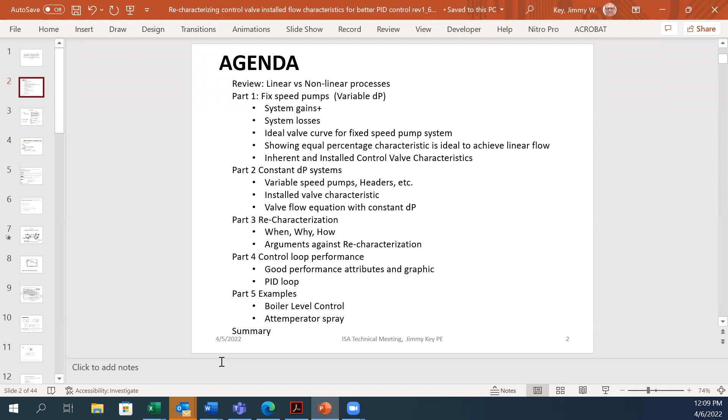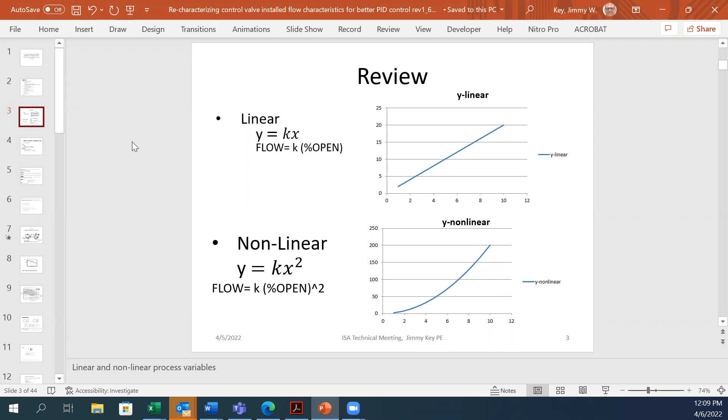The basics. The basic review is what is linear and nonlinear. Linear is basically a straight line, and nonlinear is any equation that is not to the first power. So you see below, it's got a square and it shows it's nonlinear.

A little about the control variables we deal with the most often. All these variables are linear with respect to flow. As you can see, the differential of volume is flow times time, fixed density, and level has all of those attributes, making it linear with respect to flow. Level, pressure.

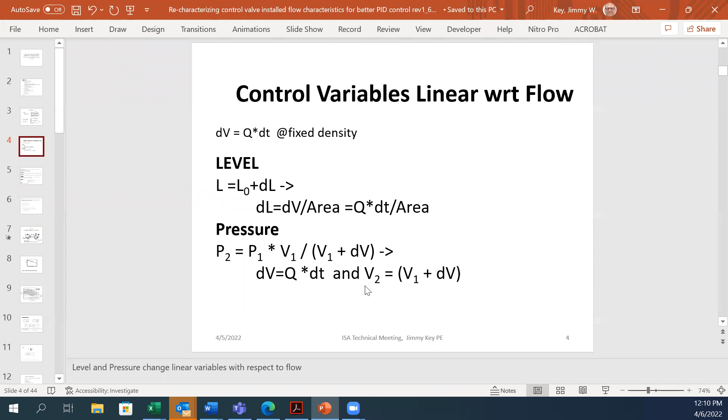I use this example, an attemperation water flow calculation example, really substituting enthalpy for temperature to show that it's a linear process. There's no radicals, no powers in here.

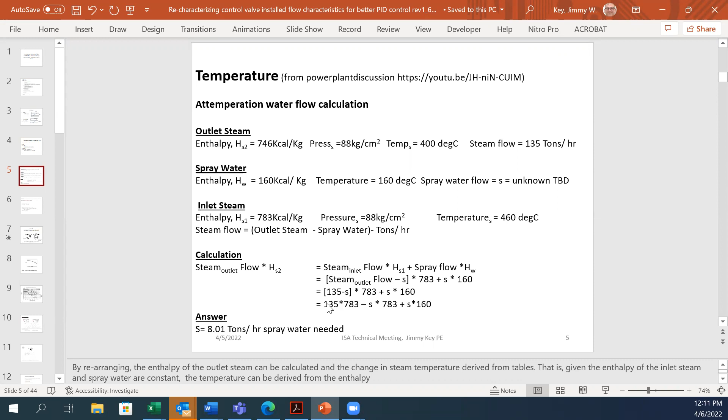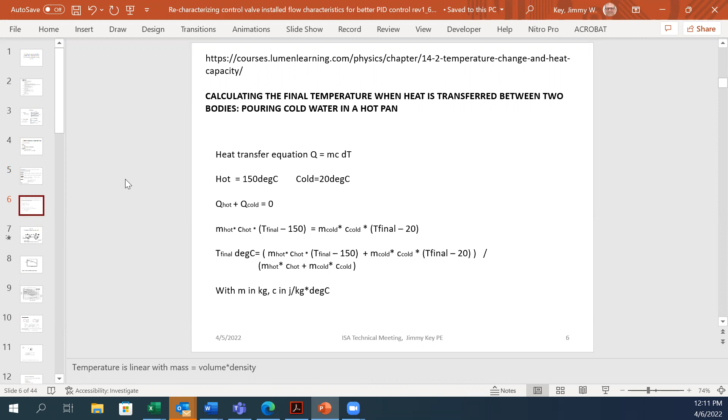And I just use this other example. Temperature is linear with respect to mass flow in this mass energy transfer equation. Any questions so far?

Okay, this next part is going to be kind of like pulling teeth, but we'll go through this as we go through the fixed speed centrifugal pumps. This is a diagram of a fixed speed centrifugal pump in a control loop. You got minimum flow valve, you got your control valve, your level control valve.

In this system, let's just look real quickly at each component of this equation, which really defines the drops across the system. We got our net positive suction head into our pump. That's a positive. We've got our pump, which is positive. We got drops caused by our valve and the velocity of the fluid through the piping. We got losses due to elevation and to back pressure. You add all that up, it should come up to zero.

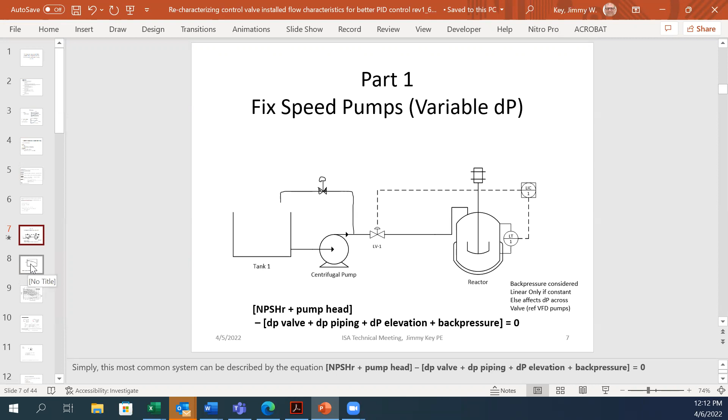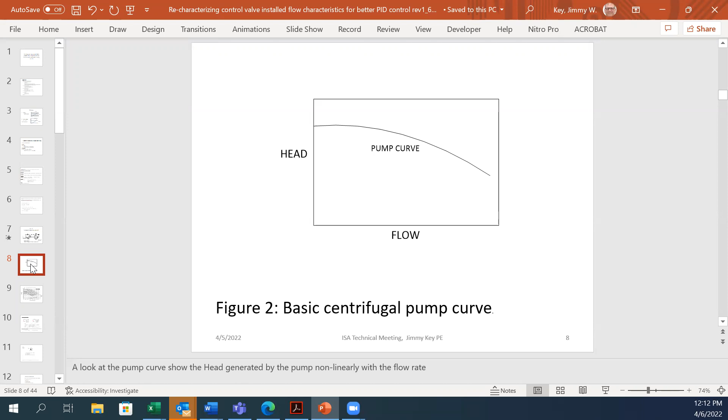Now, looking at the pump itself, the head that it generates follows the curve, from higher head at lower flows and lower head at higher flows. And you can see it's nonlinear. So this is what you see in the manuals.

And this will take care, that's probably your minimum flow for that pump that you want to make sure that you have. And of course you do that because you don't want to overheat the pump and cause cavitation and flashing inside the pump.

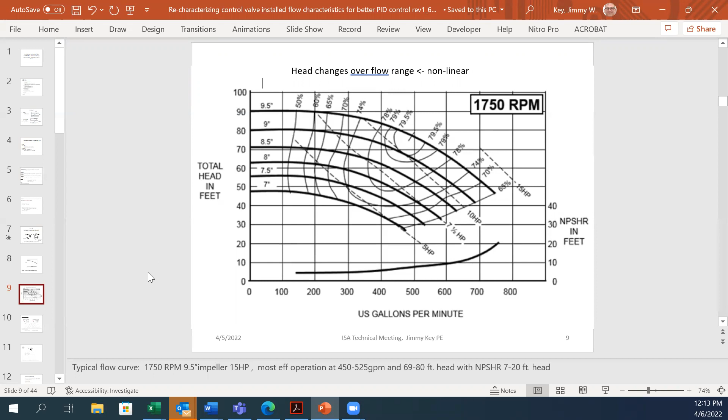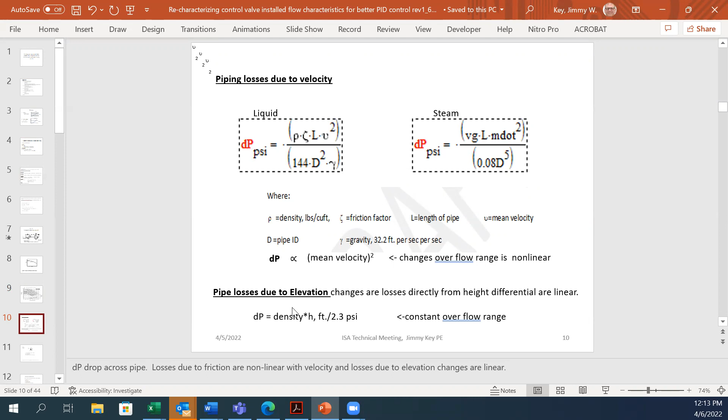And the DP loss across the valve is nonlinear with respect to flow. As you can see, here's the DP, and if you rearrange this equation, it's nonlinear. Now, the reason I'm talking about linear and nonlinear is to see that there can be a balance that can be made with the control valve, with its inherent flow characteristics that actually produce an installed linear flow.

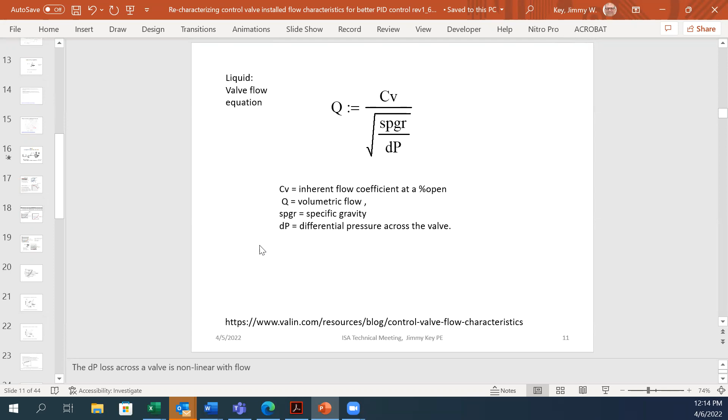But real quickly, where does our data come from when we do the sizing of this? The data usually comes from what we call a pump run, and it's done by the mechanical people, and it gives us all the data that we need. Really, they do it to size the pump, and then they allow us a certain amount of drop across the valve, and that's how we end up sizing the valve.

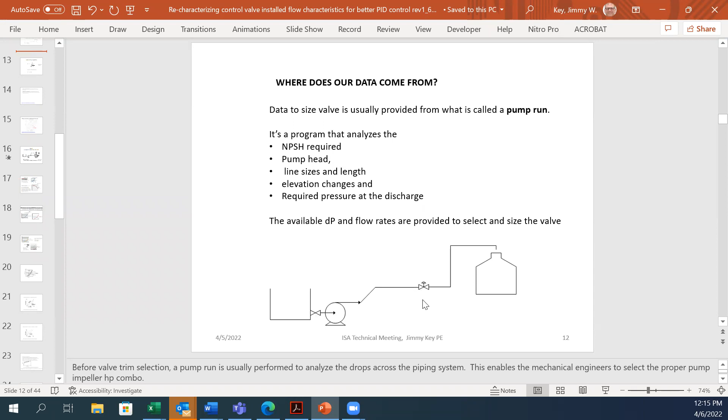This is the ISA liquid flow equation for a valve. Of course it's nonlinear due to the term in the denominator, but note that if the DP is constant, the term in the denominator becomes a constant, and this is what you get. That's a linear equation. Nonlinear, linear.

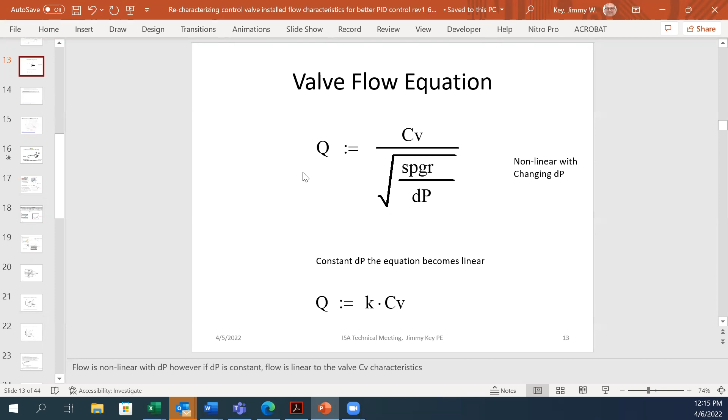So there's two different characteristics we're going to talk about here. One is the inherent flow characteristic, and that's the characteristic when a valve is operating at a constant pressure drop. And then we have an installed flow characteristic, and that's when the valve and the piping effects are taken into account.

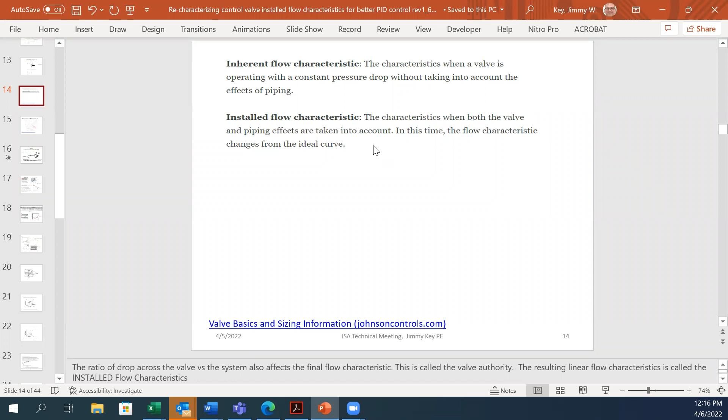There are various different types of trims you can get for valves. In most cases, we use equal percentage or modified parabolic when we're doing systems like where we have variable differential pressure across the valve, and we use linear where the pressure is constant.

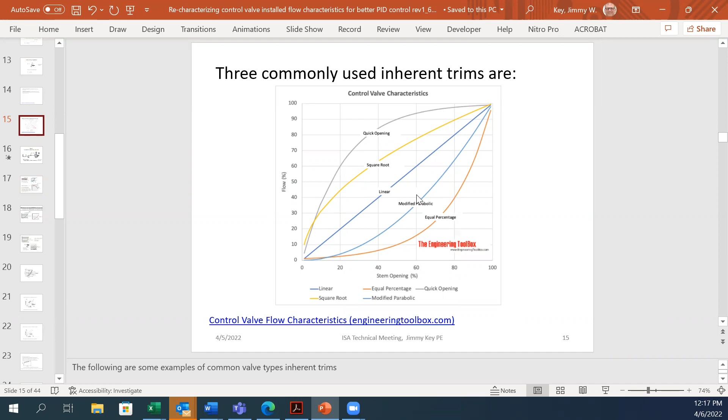Okay, let's see, this is slide 15.

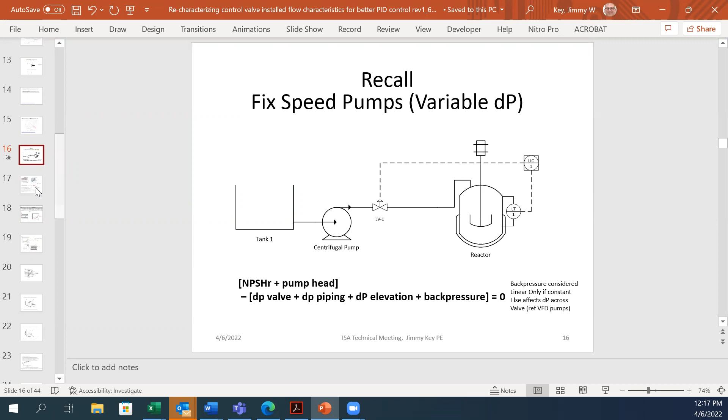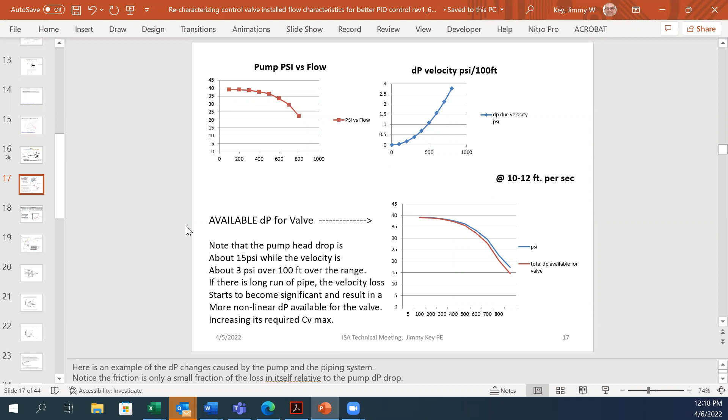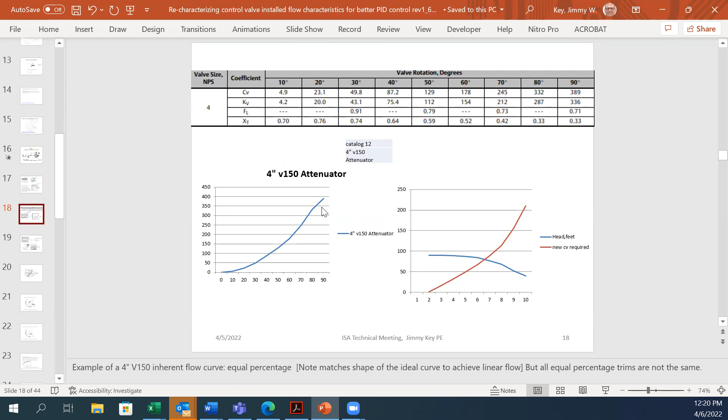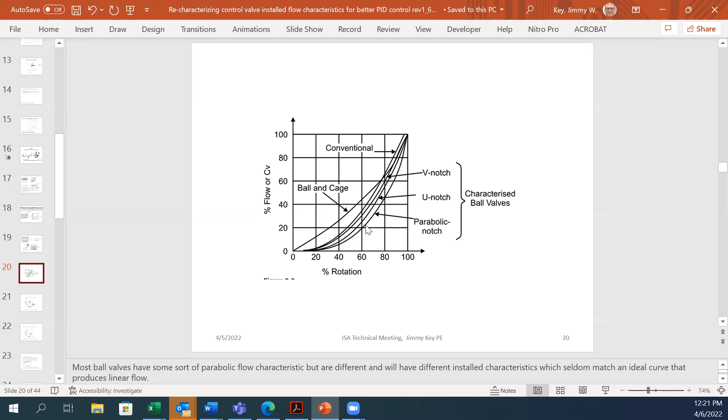Okay, but if you remember this curve here, this was perfect, for example, that we had. But not all curves, not all valves have the same type of curve. All equal percentage curves are not the same, is the bottom line there. So they won't produce a linear result as perfect as what an ideal curve would produce. And these differences result in a nonlinear process gain as you go through the stroke of the valve.

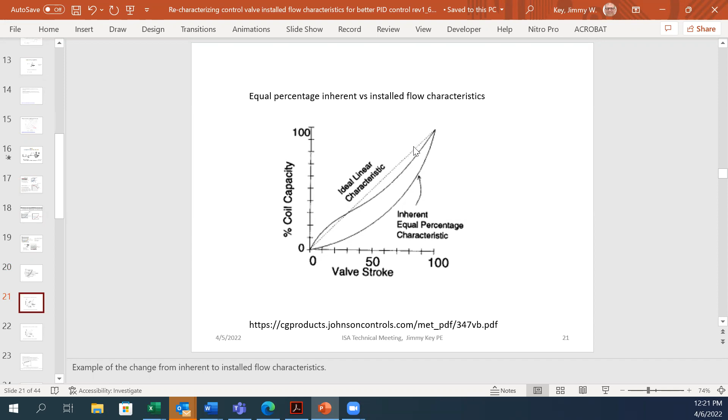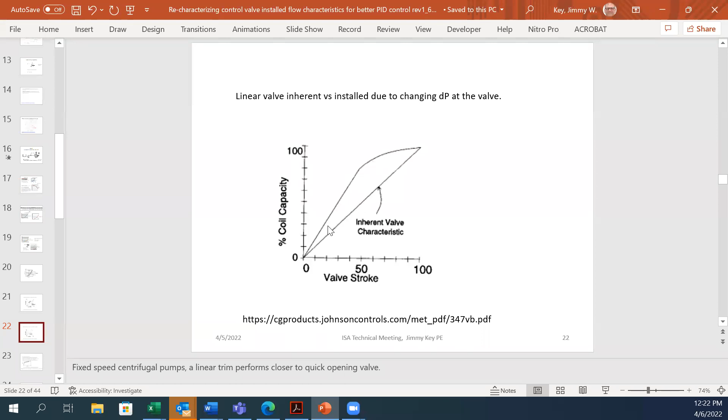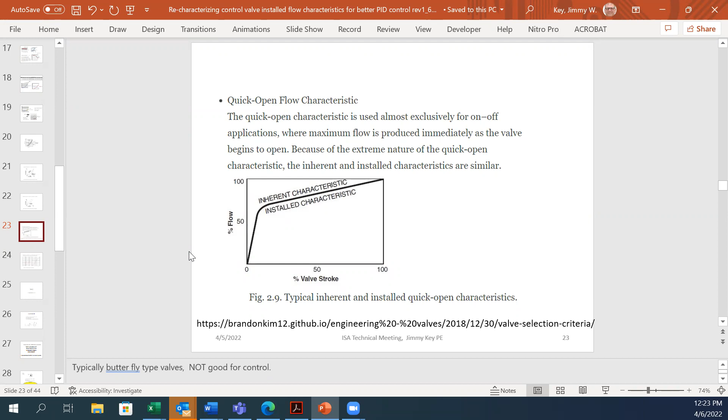In most cases, there will be some difference between the valve's ideal and actual flow characteristics. But re-characterization of the control output to move the installed flow characteristics to more linear can help you with stability and minimize valve travel.

All right, now, does anybody have any questions on material before that?

Okay, again, what we're trying to show is that by having a more linear flow characteristics from your valve, your PID controller will end up with better control. You'll be able to tune it with probably more gain and less integral. And the result should be that your integrated sum of errors will decrease and your valve travel should decrease.

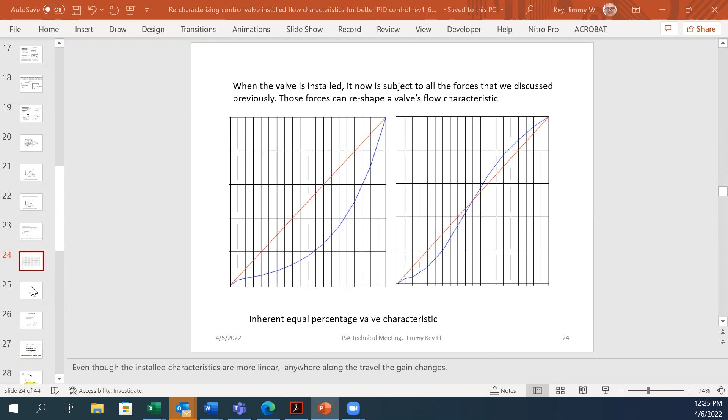So let's go on to, that's where what we looked at before were instances where the DP across the valve varied, and it varied due to the pump running out on its curve, and due to the velocity causing loss of DP in the piping system.

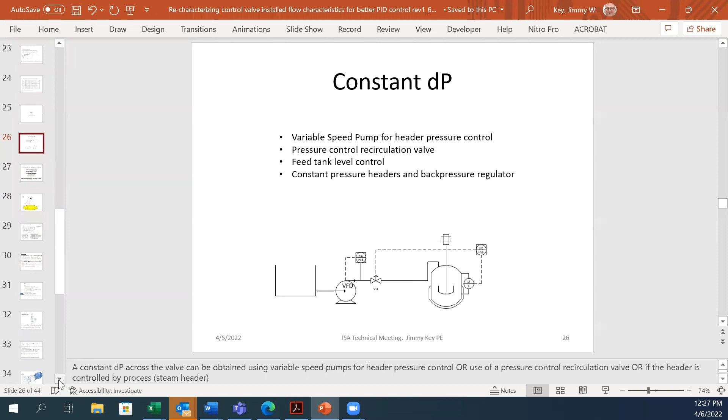With a constant DP system, installed valve characteristics follow their inherent CV curve more closely. So whatever you get off the shelf, if it's a constant DP, it will follow that curve. So you want to use a linear flow trim in that case.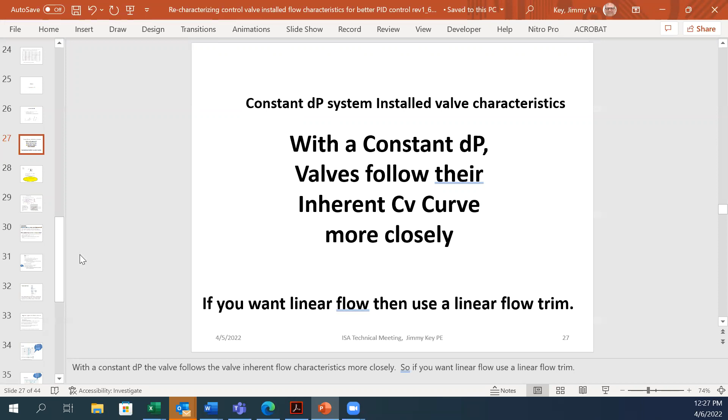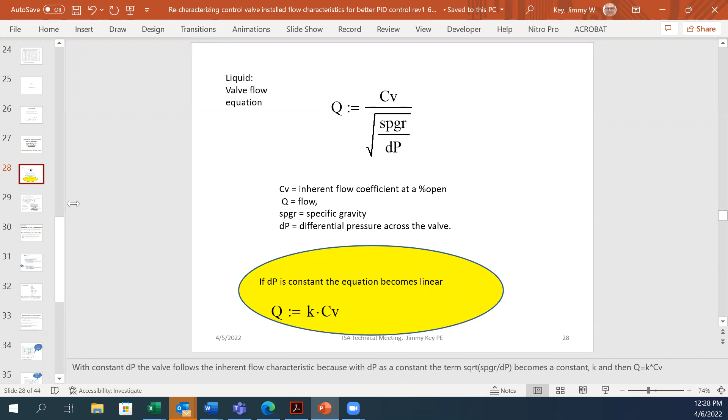You remember, this is what we get when we have a constant DP across the valve. And this is a diagram.

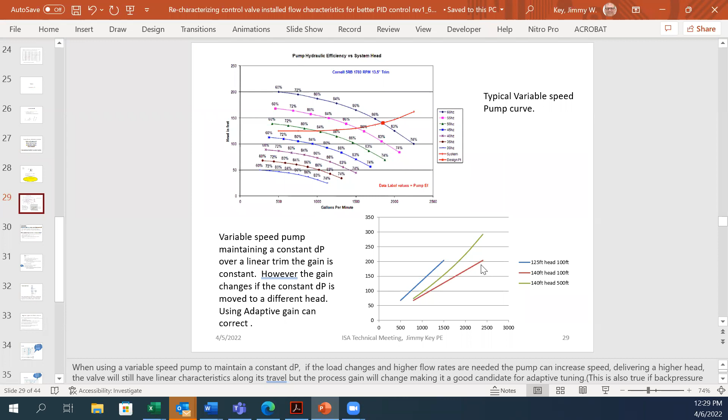This is a variable speed pump. As you can see, as the pump speed increases, not only do you get more flow, but your head increases. And what happens to your valve, if it's a linear valve, the gain will shift. So this is a good application to use an adaptive gain to correct it, because you want it to be linear the whole time, and you want the gain to have a linear profile. You don't want it to diverge.

So when would you want to use recharacterization? Well, one is when the valve's inherent curve is nonlinear and the DP is constant, and you don't want to change the trim, or you can't because of the size of the valve. When the valve's inherent curve is linear and the DP varies across the range, instead of changing it to an equal percentage trim, you might want to recharacterize it.

Or in some cases, a valve needs some sort of breakthrough when it opens. I saw this in the attemperator, where at low levels, the steam going through the valve, the water flow was so low that it would flash in the steam line, and you couldn't get water into the steam line. So sometimes you have to take a step up, like going from 0 just to 5% open, just to start seeing some effect and overcome the flashing. That's just one example.

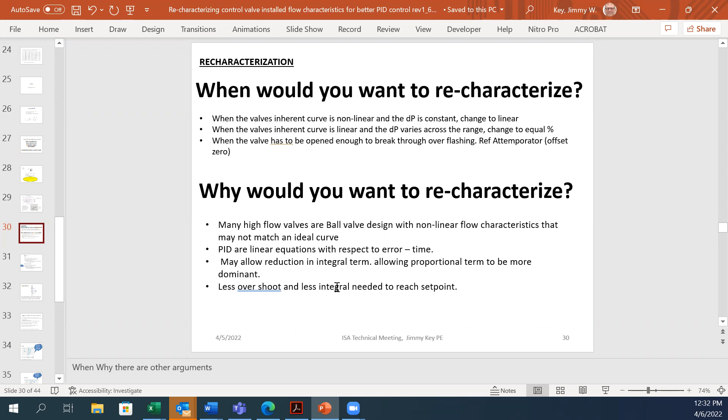Now we talked about the two different cases, variable DP and constant DP, and why we may want to do recharacterization. Now I just want to step through how you may want to do it.

Of course, if you're offline, you can, if you have flow data and valve data—this is good, but you have to check to make sure that the conditions are stable when you choose the data. Then you interpolate the percent open at fixed linear flow intervals, and build your XY table for the controller. At the end, you want to test it by opening it from 10% from your controller, which goes through your characterization block, and you should see at those intervals the expected percent flow.

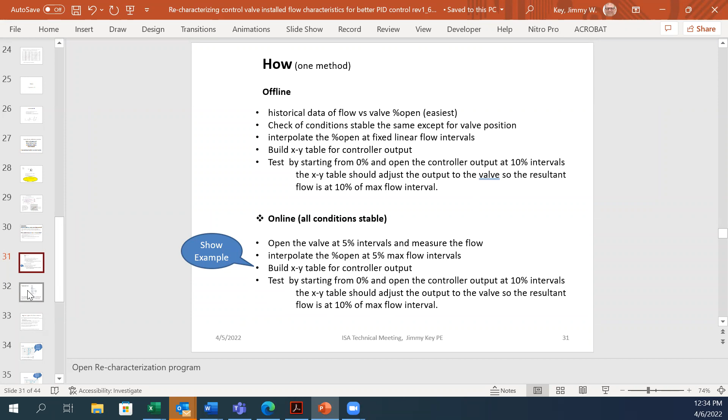Now, one thing you have to be careful of when you do this in the DCS: when the operator goes into manual and changes the valve from 10 to 50%, you want the valve to go 50% open, no matter what. When he says go to 30%, he puts it in there—in manual, he wants it to go to 30%. Well, this is the construct of the algorithm.

We've got our control variable coming into our controller, and the output of the controller, again, is 0 to 100%, and it's linear with the error, and it goes to our characterization block, to a transfer, and this is in auto, and that goes to the valve.

When in manual, you have to initialize the controller. You see how on this block we got our X and Y—well, you have to flip it so that in this block it's Y, X, out and in; over here it's in and out. What that will do is when the controller comes back over here, and they go back online to automatic, you won't see any bump. This is for bumpless transfer.

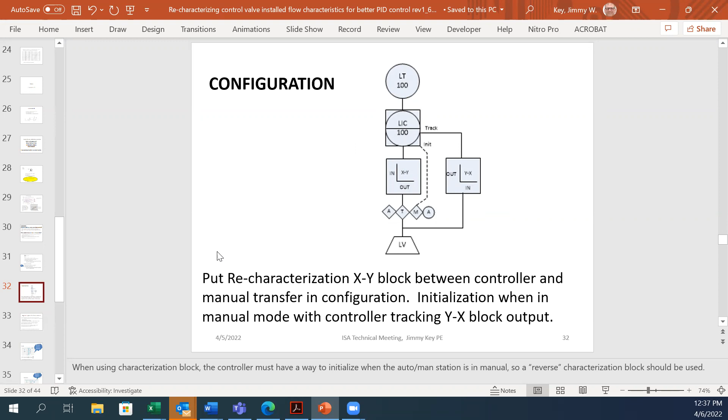Now, there's been some arguments against re-characterization. Arguments have been it's got to be maintained, can be variable for different conditions. Well, so can any type of tuning. And they say it can confuse the operators, but if you construct it like this, the operator shouldn't be confused, because this part is hidden from them anyway. They're just concerned when they go in the manual where that valve needs to go, like when they're doing calibration and things like that.

So you have to pick and choose where you do this, but there are some places where it could be advantageous. They talk about dampers and other devices being consistent in their non-consistencies and non-linearity. That can be an issue. They talk about boiler feed water valves being inconsistent in their non-linearity due to high variable DP across the valve and a variable number of boiler feed water pumps running.

Apparently they have found that because of some of the algorithms we use today, characterization is not needed, because they move the variable speed drive on the pump, so it keeps the valve in a linear position.

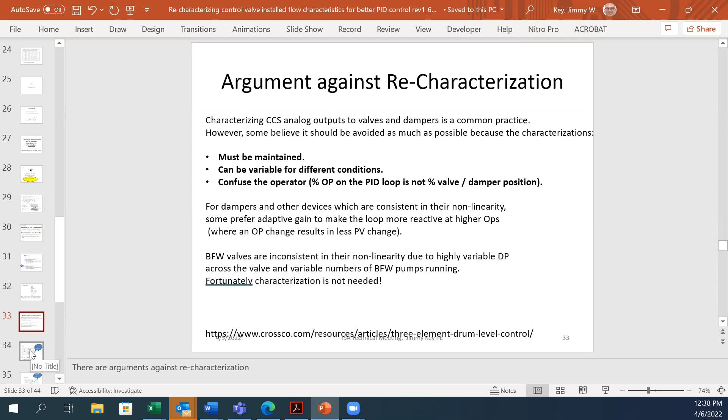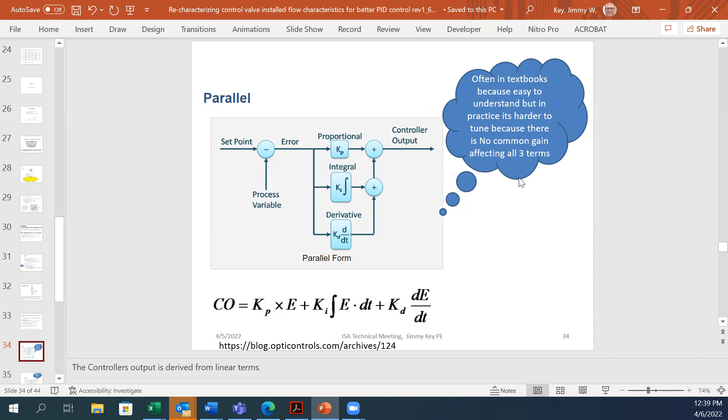Now, we talked about the marriage between the final device and the controller, and we're going to go through a few of these controllers and just look at them. This is what they call the parallel controller. This is mostly what they teach in school, so people can understand it, but it's not what some people use. There's no common gain on all three terms, so it can be challenging to get this tuned.

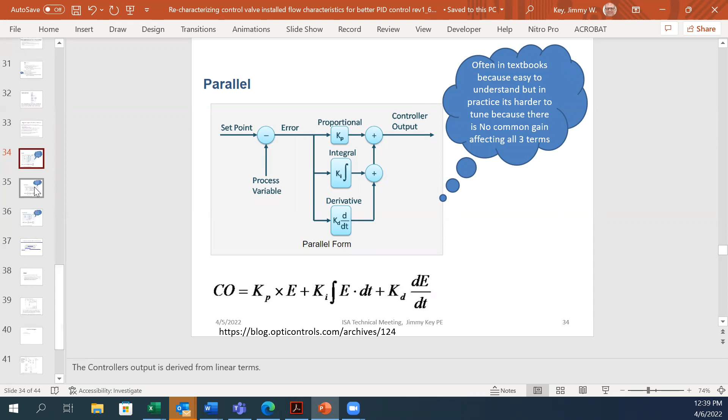Let's see. All right, the next one is the interactive. Of course, this was kind of a legacy from the pneumatic era. When you select this type of algorithm, the tuning rules that you use for this, you need to be sure you use the right ones. And for this interactive form, the Ziegler-Nichols rules were developed.

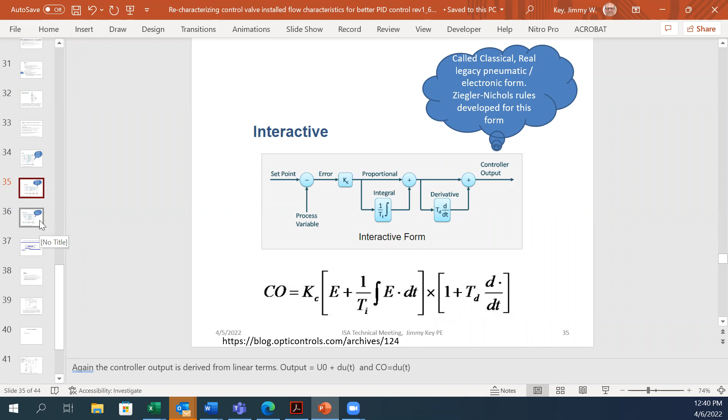And finally we got the non-interactive. This is called the ideal standard, or ISA form. And when you go and tune this, there's two rules you can use: the Cohen-Coon and the lambda. I think most people use the lambda rules for this form.

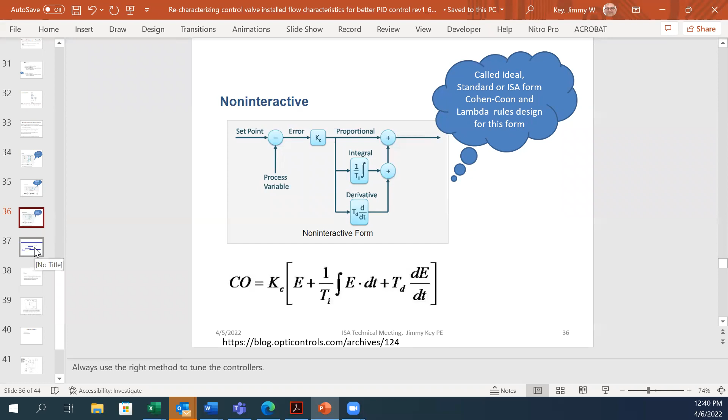So as you see, a classical PID consists of a linear structure. So what we're trying to do is get a linear structure married up with a linear flow characteristic of your final device. And the control process reacts faster and has less steady state error when you use a larger gain, as long as the closed loop system remains stable.

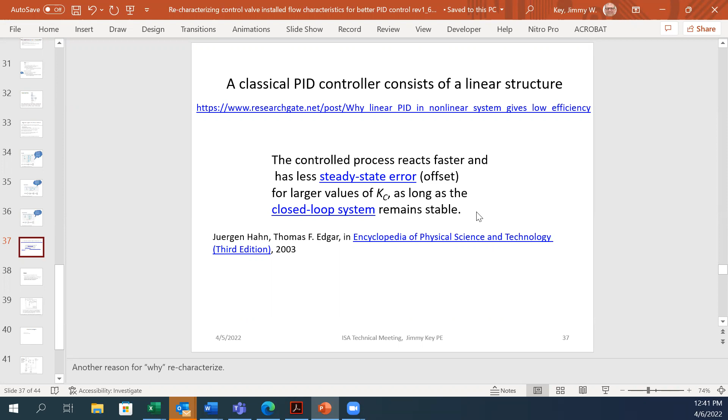So let's talk about performance. Good control loop performance can be summed up, and it's got maybe a few more, that a variable stays within the dead band of the operating set point. The integral sum of errors is small. You want to minimize valve travel, so this avoids hunting and wear of the valve. You want to have, when you tune it, an acceptable trajectory to set point when you introduce a new set point, so you don't overshoot or never reach steady state.

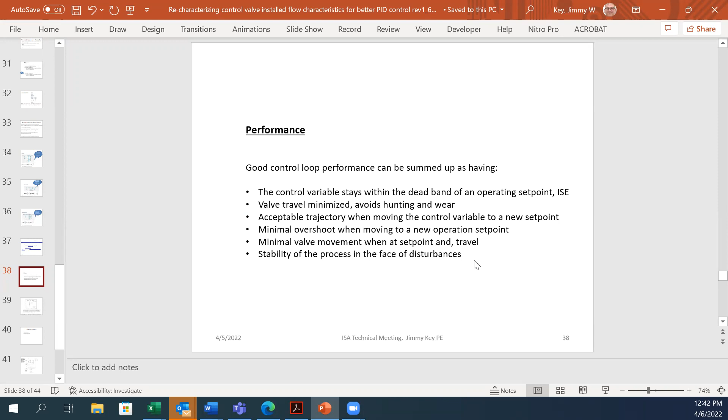Of course, you want minimum overshoot when moving to a new set point, but you want to get there as quick as possible, usually. And you want minimum valve movement when at set point, that's the hunting where it might be hunting, and you want to make sure there's stability of the process in the face of disturbances, and that usually takes when you first tune. That's why you have to go back and look at it again and again, because non-controlled processes will affect the tuning of your valve.

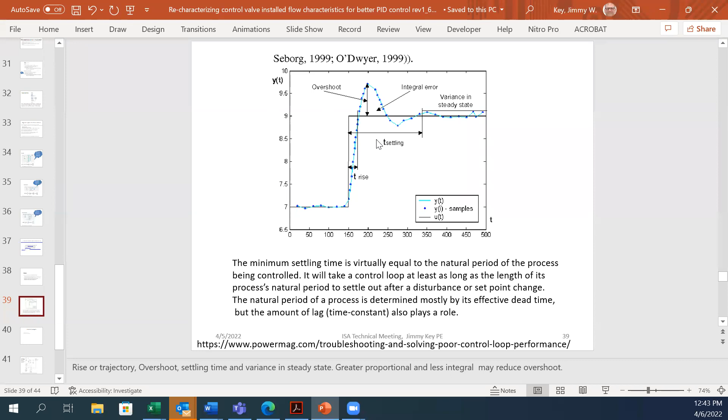And so this is just a curve. I think we've all seen this. It tells us rise time, amount of overshoot, integral error. And so the minimum settling time is virtually equal to the natural period of the process. So this is settling time. Okay, we're doing pretty good on time here. It's got a couple more.

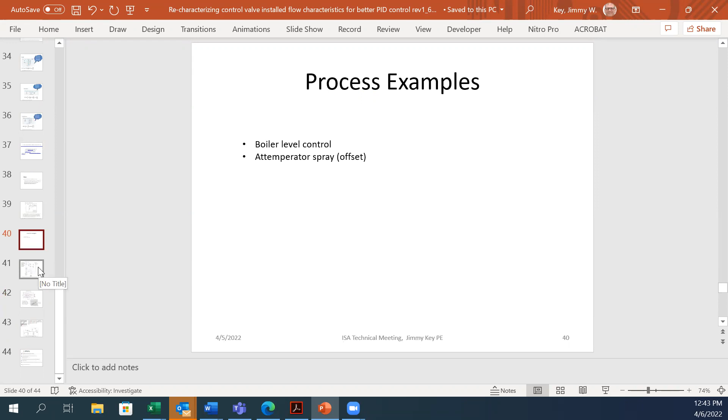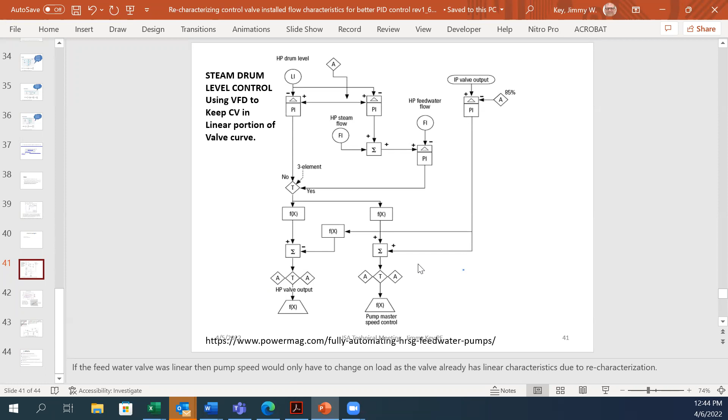Here's some process examples. This is steam drum level control, using a VFD to keep the CV in a linear portion of the valve. So as you can see, here's the valve output, and as it goes beyond a linear portion of that valve, it will increase or decrease the speed.

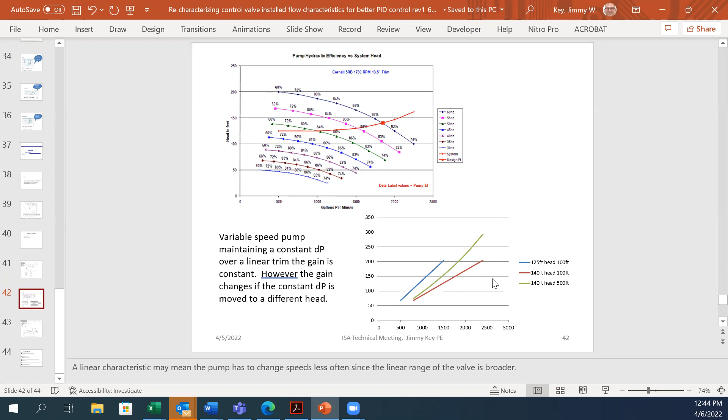And this is just another identical slide showing a variable speed pump and how the gain will change. This is the temperature example when the valve needed to open more initially to overcome some flow impedance caused by flashing when it first opened.

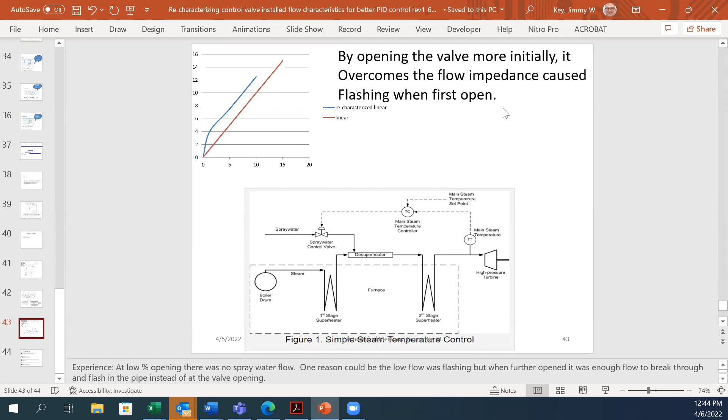And so that is about it. We can go through the summary.

Centrifugal pump curves are nonlinear. Flow velocity in pipes adds another nonlinear component. A 10 foot per second flow velocity in short runs, less than 100 feet, has a small effect.

It's best to get empirical flow data versus percent open before you do the recharacterization.

You want to place the recharacterization curve between the controller and the auto manual station. You want to provide initialization to the controller when in manual through the reverse characterization.

If the process benefits by recharacterization, then always do the recharacterization before tuning. That's important.

Use equal percentage valve inherent characteristics for fixed speed variable DPs, and for where you have long pipe runs greater than 200, or restriction orifices.

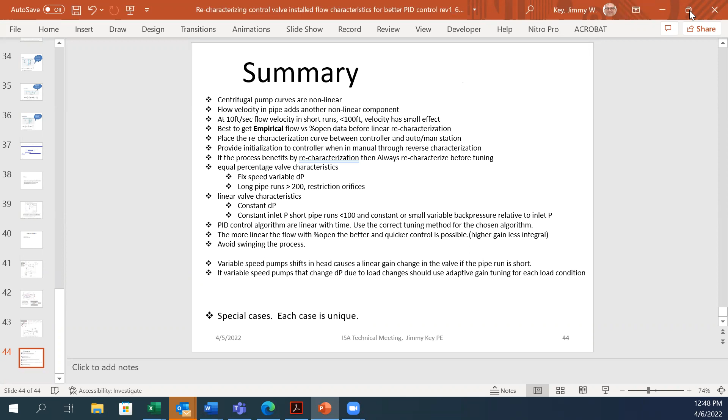Yeah, well, there are. I mean, I have. Let me see if I've got that here. I'll show you kind of, if I can find it. I may have to, it may be under this. Let's see. Now I'll move this out of the way.

Looks like a good engineer's desktop right there. Yeah, it's got a lot on it, so sometimes it takes me a while to find what I'm looking for. I need to organize a little bit better.

Let's see if I got that here. I do have a program that does that, but this is my work computer, and they're very persnickety about putting homemade software on their systems. But if you'd like, you can send me an invitation, and I can get on my home computer and show you some software that will do that.

Anybody else? So let's see, let me bring this back up. Yeah, let's see what I do.